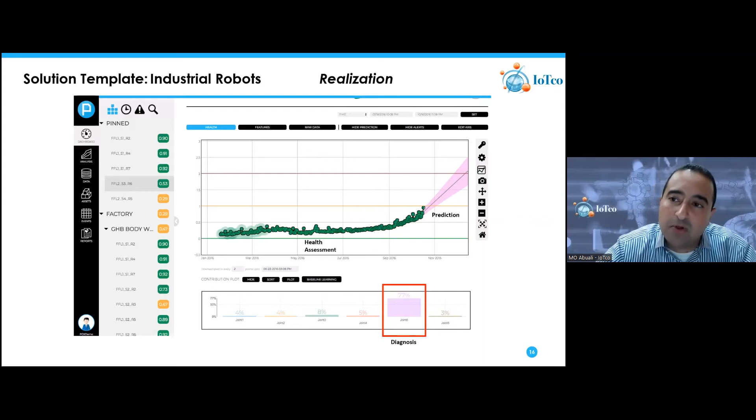What is a prediction of when this machine will fail? So you can receive alerts and notifications before it fails. And then what is a diagnostic? What is the root cause? Is it joint number 5 on my robot? So I can fix that joint and not waste time or labor or spare parts. So user experience is key for success in Industry 4.0 and AI applications.

And another quick example is machining. Whether you're doing lathes or milling or turning or grinding in automotive, there's a lot of moving parts. It's complex. There's a spindle, there's a tool, there is a ball screw linear axis system, there is a coolant system.

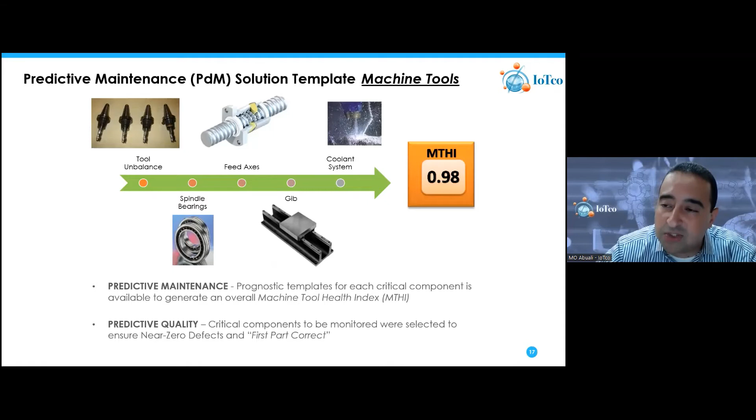So some of these, again, can utilize CNC controller parameters, such as the ball screw, using the position of the ball screw as an indicator of degradation, but also on the spindle and the tool, using an off-the-shelf vibration sensor installed on the spindle housing, and then leveraging AI would enable a manufacturer to catch these critical spindle failures before they occur.

The whole idea is moving away from a preventive approach to a proactive approach of doing maintenance, using affordable sensors and hardware off the shelf, and having an intuitive user experience, such as looking at the health of the spindle, predicting spindle failures before they occur, and understanding what is contributing to the spindle failure. For example, which harmonic relates to the inner race failure of the bearing or the outer race failure of the bearing. So becoming truly diagnostic in what you're doing on the shop floor.

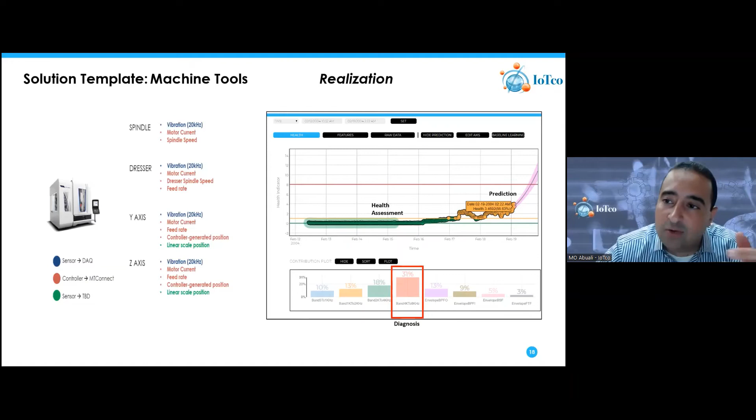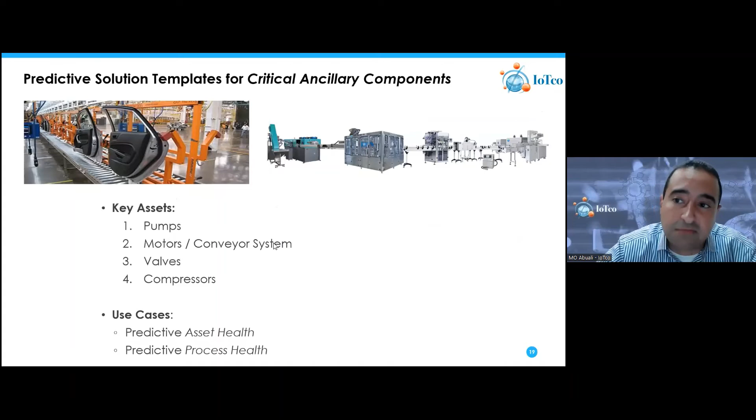Last but not least, two quick use cases. One is more on the ancillary equipment. A lot of moving parts here. What is critical for you? Is it pumps? Is it motor conveyor systems? Is it valves? We've recently started implementing a project with one of the biggest logistics sites, a fully automated logistics site of a large heavy industry manufacturer, sending the repair parts to the excavators in the field.

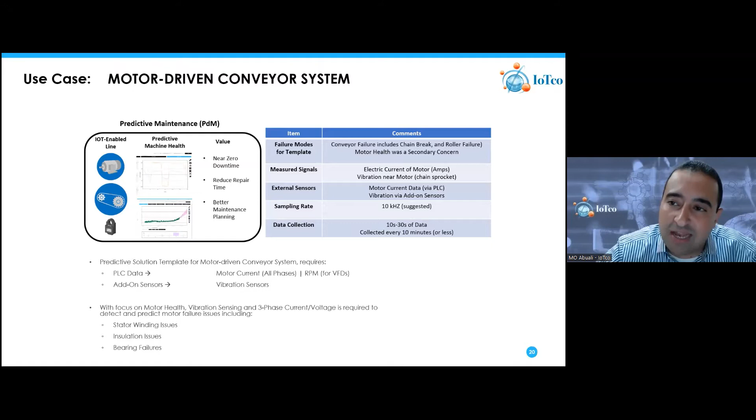So there's hundreds of motors and critical conveyors that are automating the movement of the goods. And if one of these motors fails, it shuts down the conveyor, and therefore it delays the delivery of the part. So it is uptime critical. So by implementing affordable sensing of measuring current and vibration, predictive maintenance is able to give, in some cases, 2 to 4 weeks lead time before the motor fails, so that the motor and conveyor systems can be repaired in a very timely fashion to allow on-time delivery to the customers.

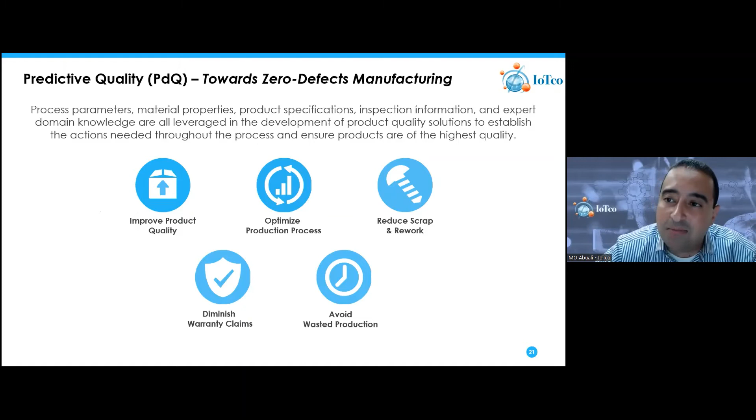And you can see here a real example from an automotive tier supplier that has over 100 casting machines across their plants. Early scrap detection and prediction can be 70 to 135K in actual savings for a mid-size manufacturer that has maybe 25 to 30 casting machines on the shop floor.

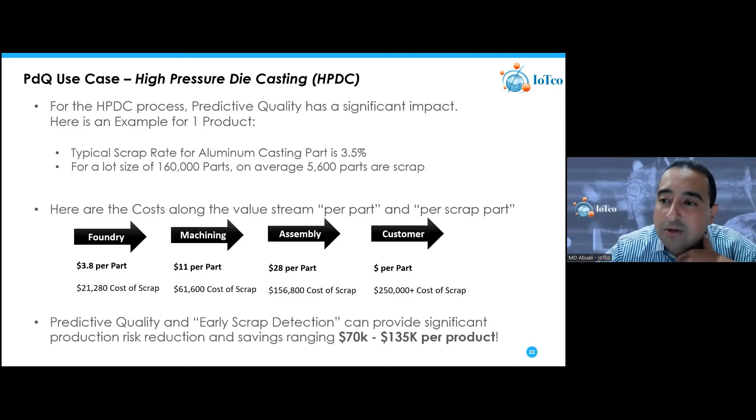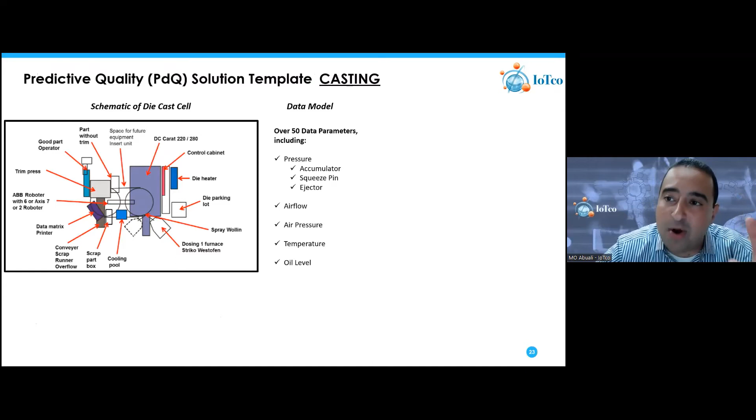So we partnered not to implement predictive maintenance, but to implement predictive quality on the shop floor and actually capture over 50 data parameters for every cycle the machine is running. And the 50 data parameters are correlated to whether a good part is being produced or a scrap part is going to be produced. So early scrap detection and prediction in a predictive fashion in the automotive industry.

And not only that, but the AI solution was also able to prescribe an action. So prescriptive analytics is about sending data back and making a decision without the human in the loop.

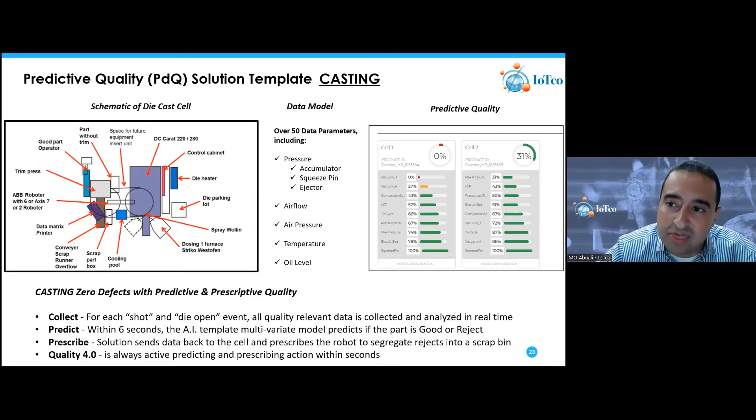So given the 50 parameters, if scrap is predicted, the AI sends a message back to the robot on the casting cell, and the robot, which is shown here, an ABB robot, would pick up the part automatically and would auto segregate the part. Is it a good part or is it a reject part? So it's a true multivariate analysis of a big data project correlating to scrap, predicting scrap, and then prescribing an action to segregate the part automatically.

Significant ROI for the business. It had its challenges, of course, in terms of connectivity and data capture, but the solution was implemented in under 3 months at an automotive tier supplier.

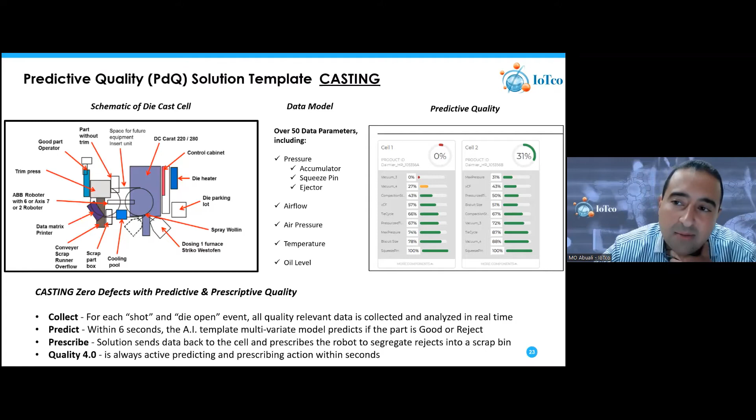So some quick lessons learned: start small, fail small, but don't be hesitant to start. If you have data, how can you leverage data towards improved maintenance and quality? Machine learning and AI is not magic. It requires expert support. We call it explainable AI. Pick a high value problem, involve your experts and bring domain knowledge to improve the analysis. It's a partnership model, and then focus on something that drives a business case in the very short term.

With this, it's really my pleasure to also invite Dr. Agrotis, we call him Dr. D, to share also some real stories from the automotive industry in his companies of how they're implementing Industry 4.0 today. Dr. D, thanks for being with us, sir. Thank you, Mo. Good afternoon.

Just a little bit of background. I have 4 daughters. I live in Hilliard, Ohio. I got my education here in the US, most of it at Ohio State and University of Dayton. I've held various positions in my career, both operations, engineering, as well as P&L. And I'm currently a director with the Charlton Group, and I have been working with IoTco for a couple of years now. Go to the next one.

So the Charlton Group owns many companies. We have equity in many companies, as well as we support many organizations, most of which are in the automotive industry, I would say 90%. And because we own these companies, we're obviously interested in their productivity and their ability to meet their customers' needs. And just from my background, obviously all being automotive, we all know Lean. And Lean is something that is now embedded in operations in the automotive industry.

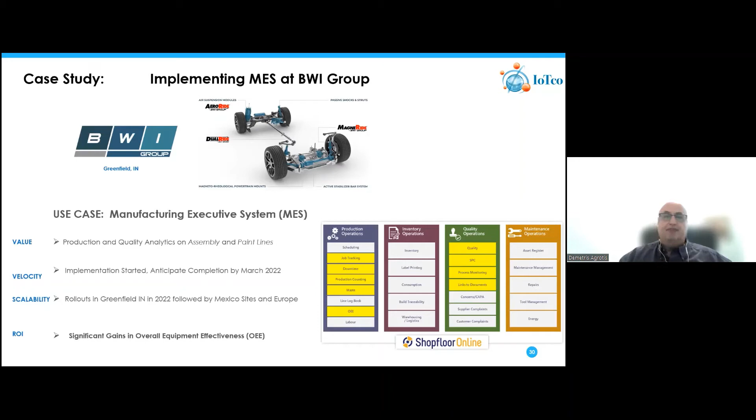Okay. So again, the slide here actually is one that I requested from the operations team at BWI. And this is actually the company's feedback that was given to me.

And this is what they have realized. And I want to make you aware that this project is in pilot phase. It's about to finish in a few weeks in the pilot. And then once it finishes in pilot, it would be scaled and propagated to other plants, as well as expanded. The yellow boxes that I showed you in the previous slide will now have more and more of those applied.

But effectively, they improve reporting times. They moved from paper charts to MES for management reports. They improved reaction times. Engineering is using the MES to determine first-time quality and downtime problems. And the control plan checks can now be recorded and enforced. And SPC for collected data is working and allows engineers to see problems.

The bottom line, the organization is using less labor to manage the data, and the engineers are able to react on the problems in real time, as opposed to wait for the next day and someone to gather the data or look at the spreadsheets or plot a graph to get a trend or whatever. So these are real benefits realized within under 2 months, okay? And based on what I have seen in the past, we expect to see a lot more capabilities and results from this project.

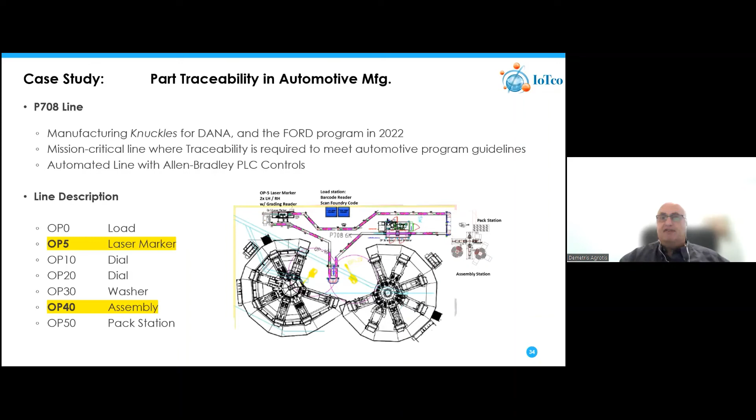Again, in order to get the data, we had to deal with plant connectivity. So we started with a plant connectivity audit, and the steps are, we're looking at the machine. Is the machine network ready, is the machine connected into the network to make the data available? And then is the machine data map documented? And again, what is a data map? It is the necessary data that we need to gather to be able to make sure that we can trace and create the birth certificate for this product.

So again, it's a procedure, it's like continuous improvement, but the fundamental element is the data. Once you have the data, Industry 4.0 tools will allow you to become much, much smarter. Next one, Mo. So the next one is a predictive analytics example, really AI, and it was with Dura in Czech Republic in a plant that manufactures battery trays.

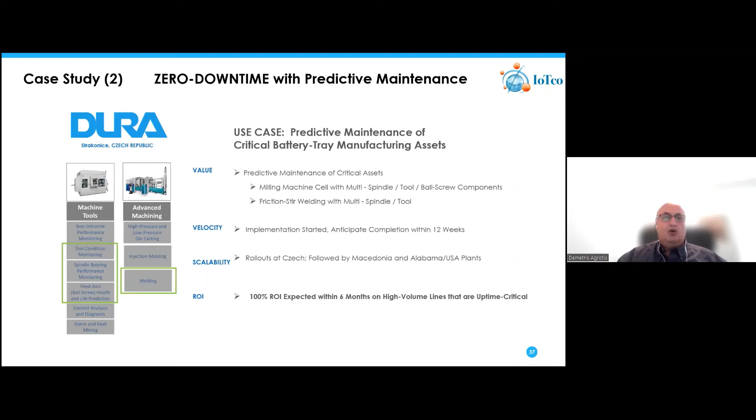In this case, the importance was a milling cell as well as a friction stir welding cell. You could see there were 3 templates deployed for the milling machine, spindle bearings, tool wear, and ball screw, and then spindle bearings for the friction welding machine. Again, capturing the data was important. Here, what you see is actually the data.

You're seeing the elements that we talked about before, where the problem could arise, how the data was gathered, where a vibration sensor needed to be added, or where the data was available through the controller, some of the sampling frequencies, and as you could see, most of the data is coming from the controller. Vibration data was coming through an external DAQ that we used from National Instruments. Very, very low cost to implement and very, very fast implementations.

I don't remember if Mo covered it, but effectively we can take a machine, set up the sensors and have a pilot running in about 3 months. So these exercises are not years and years to return ROI. You're able to return ROI very, very quickly. Again, you've already seen this slide. We were looking at spindle, the dresser, the y-axis and the z-axis, vibration, motor current, spindle speed, feed rate, and so on and so forth.

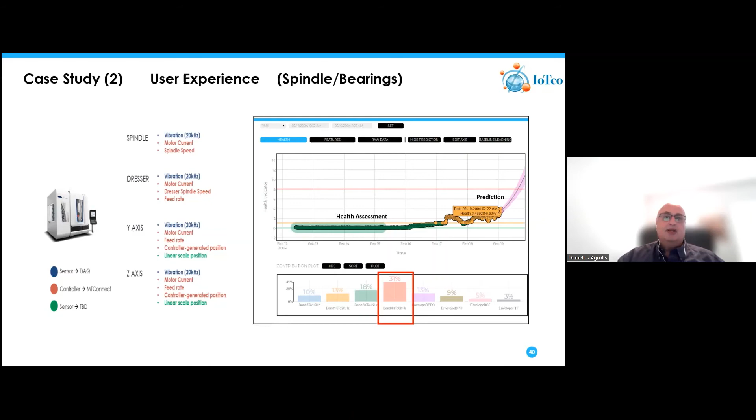And really, the assessment involves 6 steps that have been developed. And the first step is manufacturing strategy, which is really people and process. What's your manufacturing strategy? What are the critical manufacturing processes that are used? What are the product volumes and mix? What drives ROI for your business?

This is very important. And I mentioned before, just because you have a tool, it doesn't necessarily mean that it's going to return an ROI. It has to be a critical tool. It has to be a tool that if the line goes down, the impact to the business is very high. Maybe you shut down your customer, maybe you have to work overtime, maybe you have to do premium shipment. So we need to understand the pain points relating to the manufacturing strategy or the requirements and the expectations that the customers have from this plant to decide what is critical.

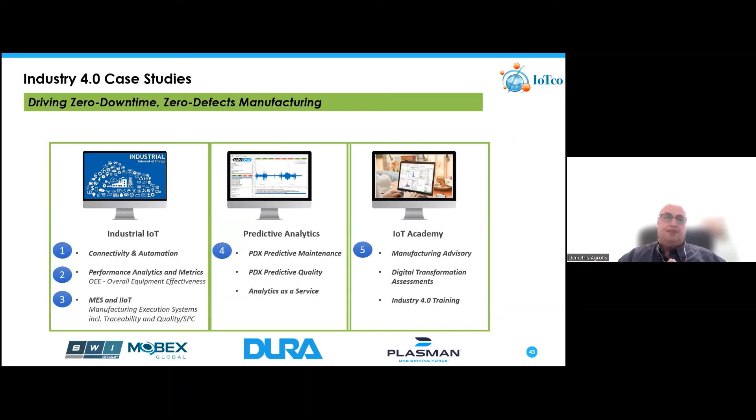But we wanted to come here today and really give the team a refresher. What is Industry 4.0? What are some of the key tools that are being used today around AI and machine learning? Again, for the business case of predicting maintenance and predicting quality issues and improving. And again, thanks to Dr. D for really taking us through a journey from maybe the lowest level of maturity to the highest level of maturity companies and what they're doing digitally to drive improvements in their operation.

And my conclusion is, Industry 4.0 can be done in a very systematic manner. It's about thinking big, having a vision, but starting small in the right asset with the right people to deliver the right metrics and results. And that proof of value allows you to take that template and win and celebrate that win and then scale that opportunity in other operations.

And Dr. D very well covered the first piece, which is assessment, and how one organization didn't know what they don't know type of thing, and they were looking to really assess everything. There's also more targeted assessments that can be done. If you are looking into AI and predictive analytics today, there's also some targeted analytics assessments that can be conducted. And the assessment shapes the path, paves the path toward technical workshops